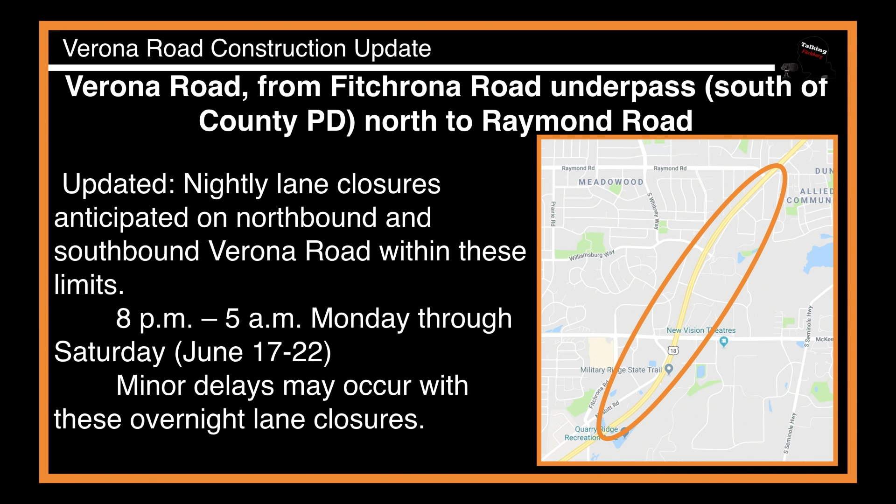Verona Road from the Fitchrona Road underpass, south of County PD, north to Raymond Road. Nightly lane closures are anticipated on northbound and southbound Verona Road within these limits, 8 p.m. to 5 a.m. Monday through Saturday. So tonight through Saturday, you can expect minor delays during the overnight lane closures.

Resurfacing work is planned on Williamsburg Way between Verona Road and Anton Drive. Noise from backup alarms and equipment is anticipated with overnight operations from 12 a.m. to 5 a.m. Thursday, June 20th. This work is weather dependent and subject to change. We appreciate your continued patience during this project. Be on the lookout for that.

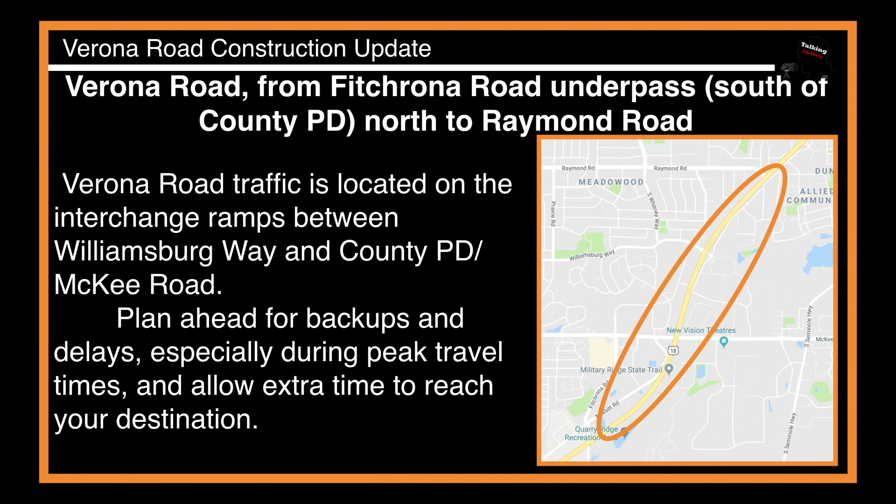Verona Road traffic is located on the interchange ramps between Williamsburg Way and County PD/McKee Road. Plan ahead for backups and delays, especially during peak travel times, and allow extra time to reach your destination. The Verona Road and Williamsburg Way intersection is partly closed until July 2019. Only right turns in and out are allowed at the intersection as crews build the bridge. No left turns are permitted either direction during these operations.

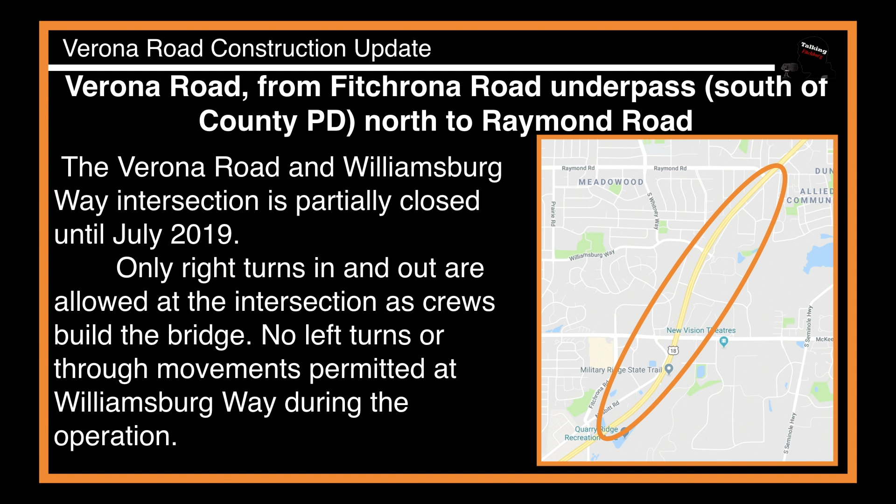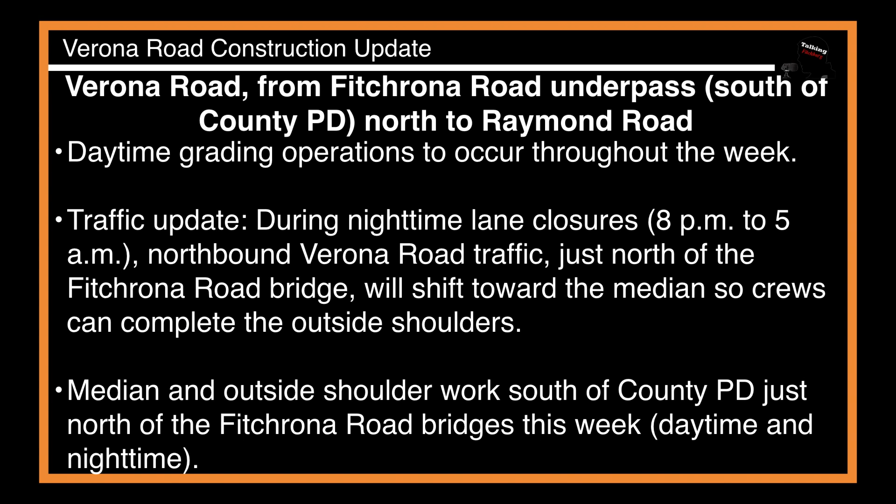Daytime grading operations will occur throughout the week. Traffic update during the nighttime lane closure, 8 p.m. to 5 a.m.: northbound Verona Road traffic just north of the Fitchrona Road bridge will shift towards the median so crews can complete the outside shoulders. Median and outside shoulder work will also take place south of County PD, just north of the Fitchrona Road bridges this week, with daytime and nighttime work going on there.

Pier construction, abutment construction, and excavation work continue on north and south County PD in the new lanes of Verona Road. Bridge approach work is planned next week at Williamsburg Way, at the east and west ends. Daytime concrete crushing will take place over the next several weeks between Williamsburg Way and Raymond Road within the work zone. If you haven't seen that thing, it's massive.

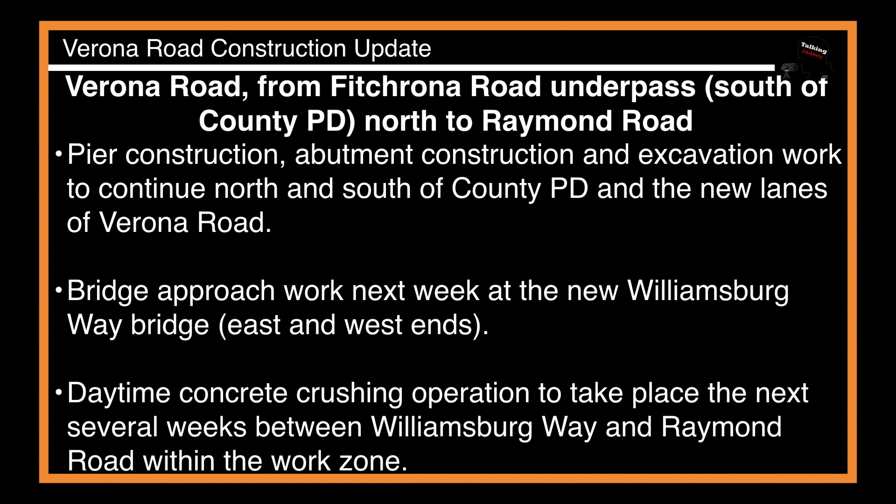Just saying, it's also cool that they can do that all on site. Or maybe it's bad, I don't know if that's good or bad.

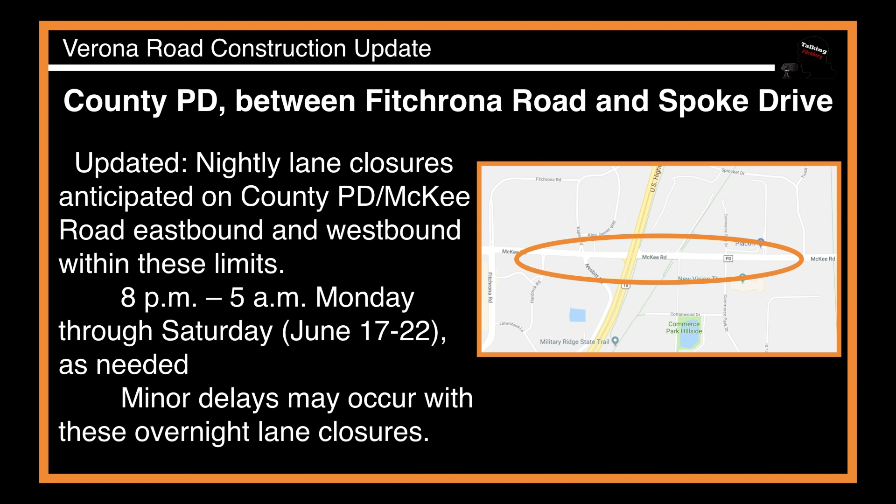I think it would save impacts on roads with less trucks. Nightly lane closures on County PD between Fitchrona Road and Spoke Drive. Nightly lane closures are anticipated east and westbound within these limits, occurring 8 p.m. to 5 a.m. through the overnight hours through Saturday, today through the 22nd as needed. You can expect minor delays to occur when the lane closures are in place.

Turn restrictions are in effect from Kapec Road to eastbound County PD. You can't make a left turn off of Kapec, so through traffic and left turns off Kapec must use the Fitchrona Road intersection with County PD. All turning movements for Nesbitt Road remain open during construction.

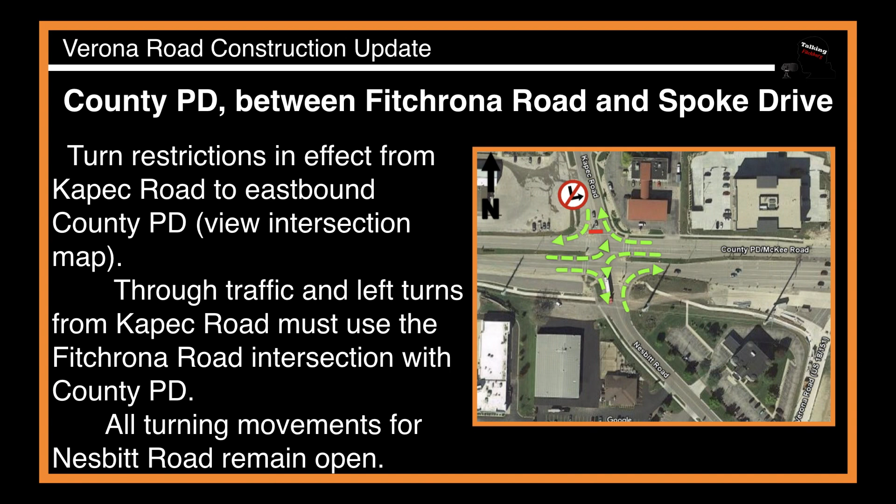We're going to get an update from him this Thursday because he's part of the open house happening.

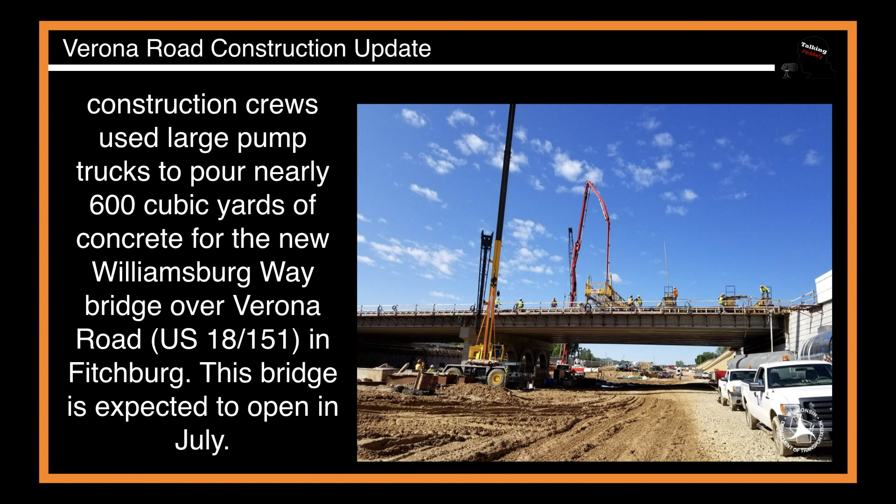That's going to be that crossover intersection, sort of like it is at the Beltline. They are just cruising along. I don't know what makes it feel different than the other parts, but it just feels like they are cruising, which is good because this is the big part, making these bridges and making this Verona Road go over PD.

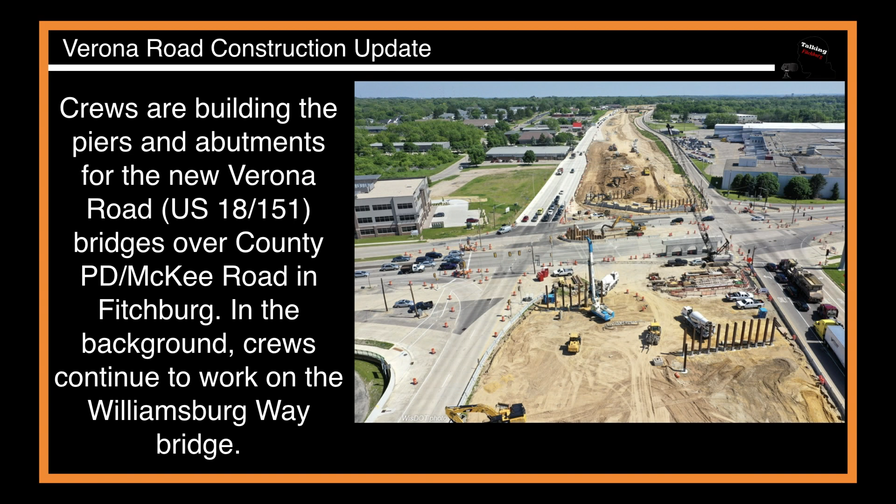So smart. And the concrete that's being smashed is also being used as ground barriers and bottom layers and stuff. That's pretty neat, pretty impressive stuff.